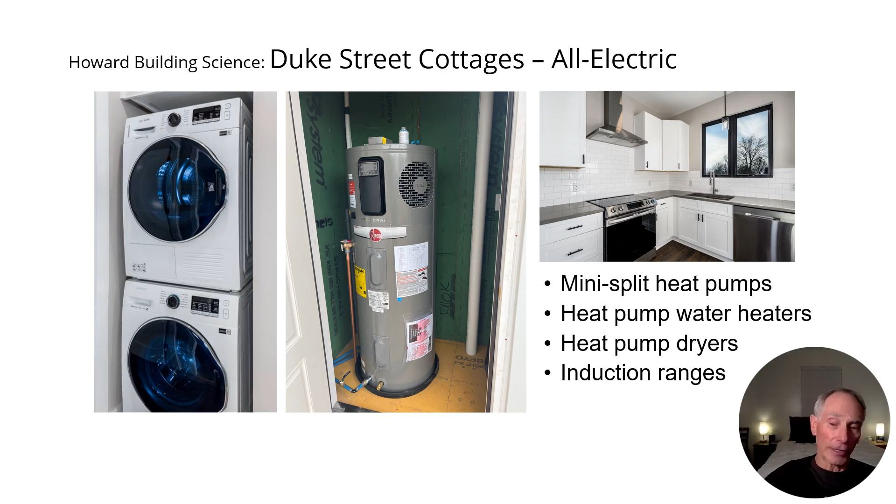Now, looking at the project details, you'll also see that it's not just that it's affordable, but the actual components and all the details come with excellent quality. First, you see this all-electric home comes with very outstanding components. You have the washer dryer that's high efficient. You have a very efficient water heater. You have efficient kitchen appliances, induction cooktops, and you also notice the kitchen counters and cabinets, also excellent quality.

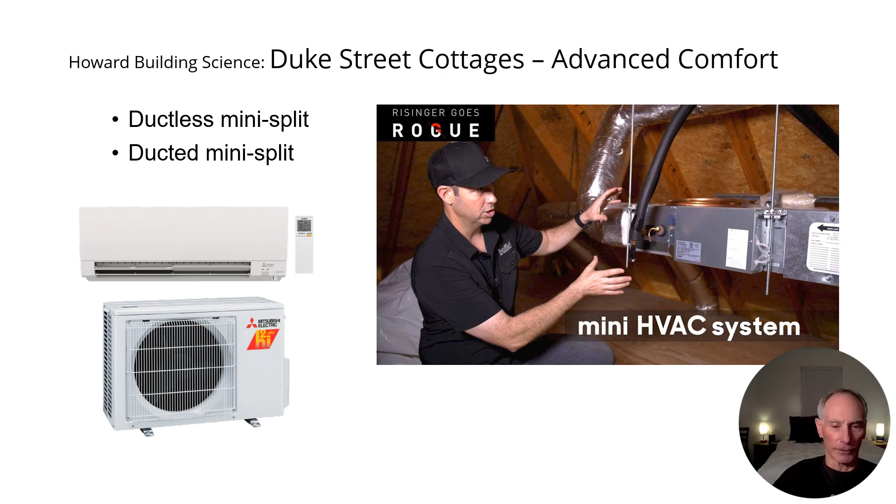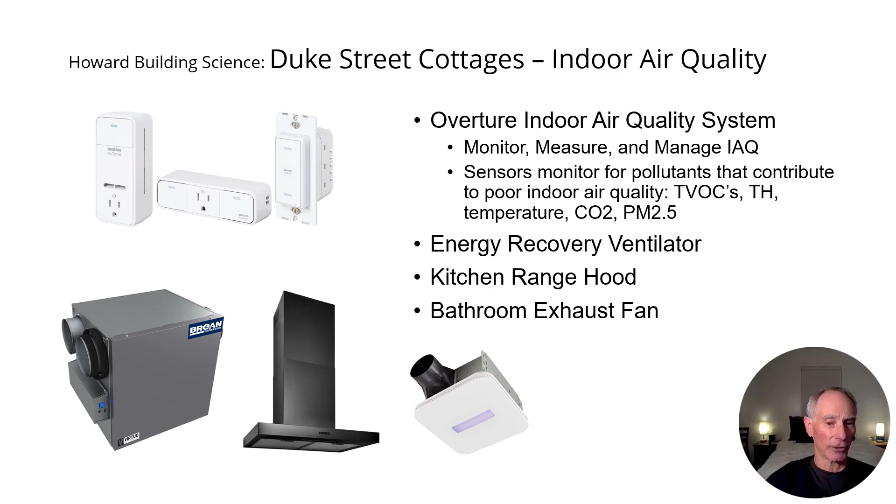Then comes the advanced comfort system. This uses a ductless mini split inverter driven heat pump for outstanding temperature control, low energy use, and really good comfort. So this is also a high quality feature of these homes. And last, in terms of quality features, I'll call attention to the indoor air quality package. In addition to all the requirements of EPA Indoor airPLUS, the whole house ventilation, the source control, the high capture filtration, you have monitors and sensors to actually track the outstanding indoor air quality performance of this home. So this is an outstanding home.

So before we go into that, I do want to highlight one very significant feature of this project. It is SIP optimized. Last video we showed you the resource for determining if you're SIP optimized or not. That's an important resource for you to check. But when you're SIP optimized, you'll see that the numbers come out really compelling in terms of the business case for using SIPs.

Here I show the floor plan, which is a very convenient, simple geometric shape. It has 2-foot dimensions, which work with the SIP panels being used. Look at the roof line, how simple and easy it is to build with SIPs. And in addition to that, the locations are easily arranged for the posts and the beams, and the span from the walls to the ridge beam are all aligned with meeting the requirements of the SIP panels. So again, outstanding optimization for this project.

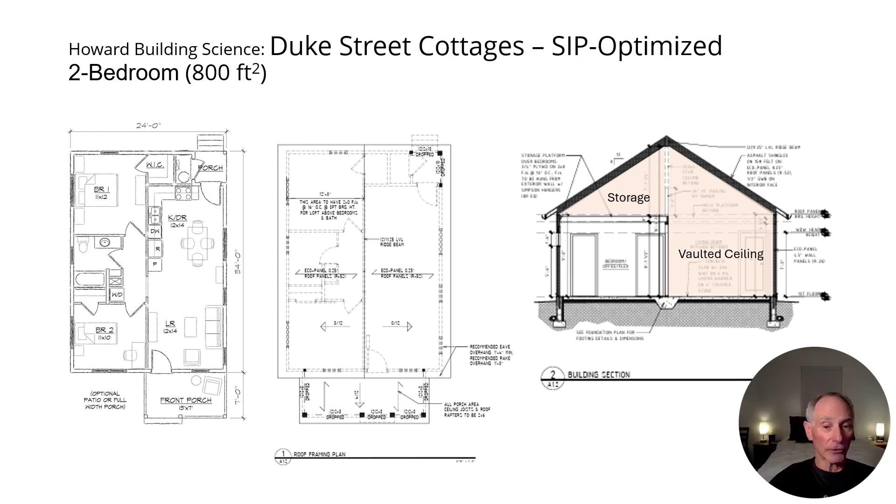Let's see how it works with SIPs, with the SIPA True Cost bidding tool. And as we discussed last week, this is where everything begins. You go to the guidance documents that you can choose from, and you use a bidding tool checklist on every project you do.

It's completely organized to align with the inputs, as you will see on the following slides after we look at this. Last week we showed you the layout of the checklist. Now what you want to do is complete it for a specific project. The key point to know is you don't have to fill in every number. If you don't know it or it's missing and it's not critical to the project, don't worry.

Let's go through one section at a time, starting on the backside of the checklist with cycle time. What we've done is group all the individual construction components so you can easily enter the cycle time or number of days required for framing compared to SIPs. So you see for structure, it's 6 versus 3 days. For insulation, it's 2 versus 0 days. And of course, that's because the insulation comes with the SIP when you install the panel.

Airflow control is 3 days versus 0 days. And again, this is because the SIP installation, as you will see, includes all the airflow control. Finishes is 2 versus 1 day. Mechanical, electrical, plumbing, or MEP, is an extra day for SIPs. We'll explain why a little bit down the line here. And then quality control is 2 days for framing versus 0 days for SIPs. So it's really important to figure these out on the front end because cycle time is a very important component of true cost.

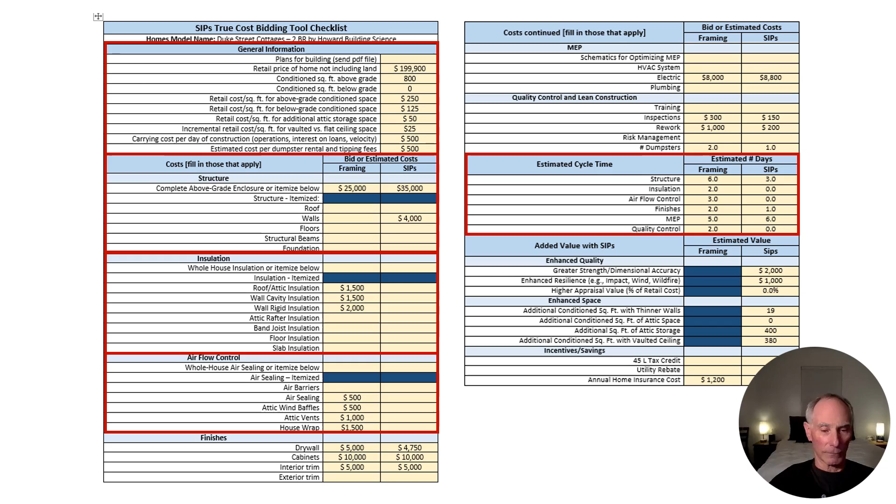So you see those costs for framing, but no costs for SIP. Then for finishes, you see a cost difference for drywall, $5,000 versus $4,750. We took a few percent discount for SIPs because with construction of drywall, in this case, you have the OSB around the entire perimeter, which means you don't have to find studs for attaching the drywall and then cut and have waste and time and all the effort to get the waste to

the dumpster. So normally I would recommend 20–25% of the drywall price be a discount number you deserve because of all the reduced waste and labor by the drywall subcontractor. But this will be something you have to eventually educate the drywall contractors and work to get them to provide that discount. Admittedly, right now it can be difficult.

For cabinets and interior trim, it's the same prices. I put them in just to keep a record of costs. The SIPA True Cost Bidding tool is a great tool and resource for you to kind of document the numbers that you learn for construction cost.

Then comes mechanical, electrical, plumbing, MEP, and the only number I entered were the different costs for electric. I assumed this would be one of the first projects for the electric subcontractor and that maybe they attach a 10% premium. So the $8,000 would be the cost with framing and $8,800 for SIPs.

What's important to note is that what we hear over and over again is electric subcontractors get used to wiring SIP homes very quickly with no additional expense, and some electric subcontractors say it's actually easier with SIPs. So as you get past the learning curve, you should almost have no cost difference between framing and SIPs for electric. You should also note there's a line here for schematics for optimizing MEP.

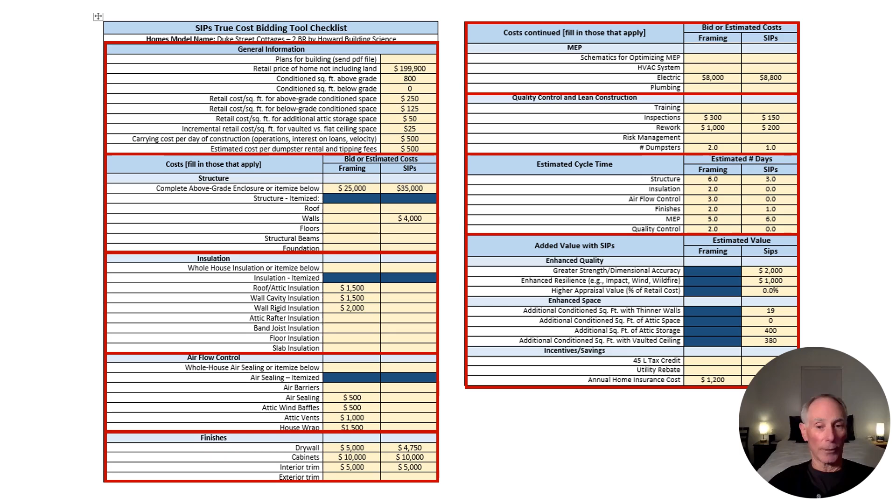Now the hard work is over. You've collected the data. Now in minutes, you can enter it in the bidding tool and get your results. So let's move to the bidding tool.

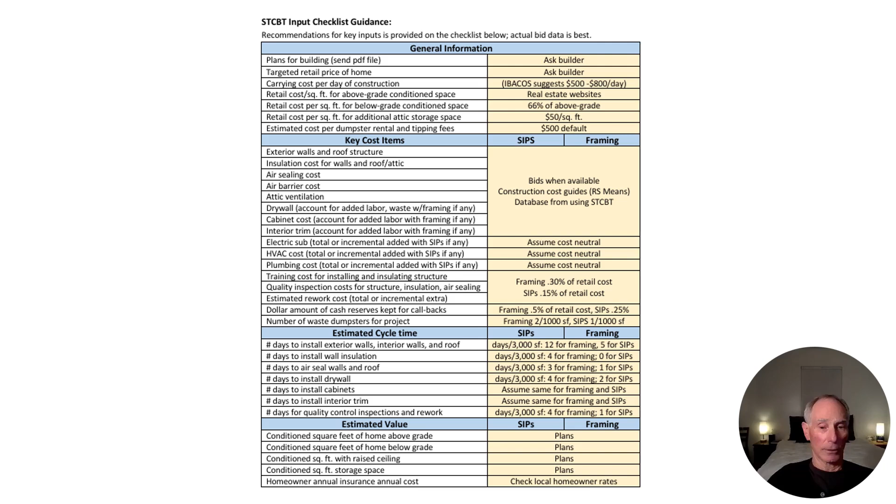But first, let me again remind you that you have this guidance document called the True Cost Bidding Tool Input Checklist Guidance. A lot of the numbers I've used in this quick review of how I filled in the checklist for this project come from the suggested default numbers on this particular reference piece here. So remember you have this if you get stuck, to pull some numbers out to fill in blanks on your checklist.

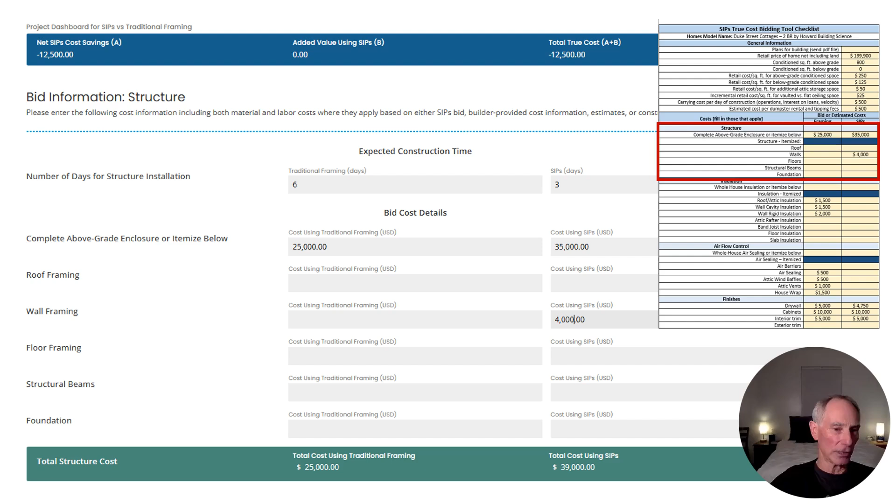So the total true cost, the savings plus value, is minus $12,500. I'm not going to review the detail of how we get to these numbers on the next sheets. It's always the same. What I will highlight, though, is how the net cost savings changes as we incrementally add more inputs for each component.

So let's go to the next page, insulation. These are the insulation numbers we put in on our checklist. Now we simply added them to this page over here. You see the costs for roof attic insulation, wall cavity insulation, and rigid insulation or continuous insulation come directly from the checklist, with 0 cost for SIPs. And remember on the back side we had the number of days for insulation as 2, and no days to install insulation for SIPs because the insulation is part of the SIP assembly.

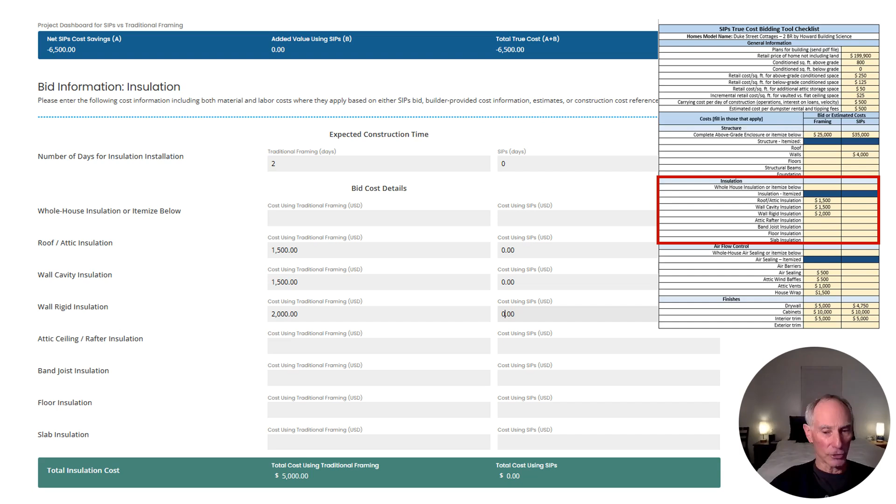There's no additional insulation contractor coming in to do the work. So we save 2 days not having that trade come in to do the insulation. So now you see that sum here is 0 for insulation, just for the work on insulation, not counting time. And the sum for the insulation for conventional framing is $5,000. So now we have $5,000 plus 2 days is $6,000 of net cost savings with SIPs. So the $12,500 dropped to $6,500 negative. We lost $6,000 from the number on the first page when we just did structure. And that's how this will work.

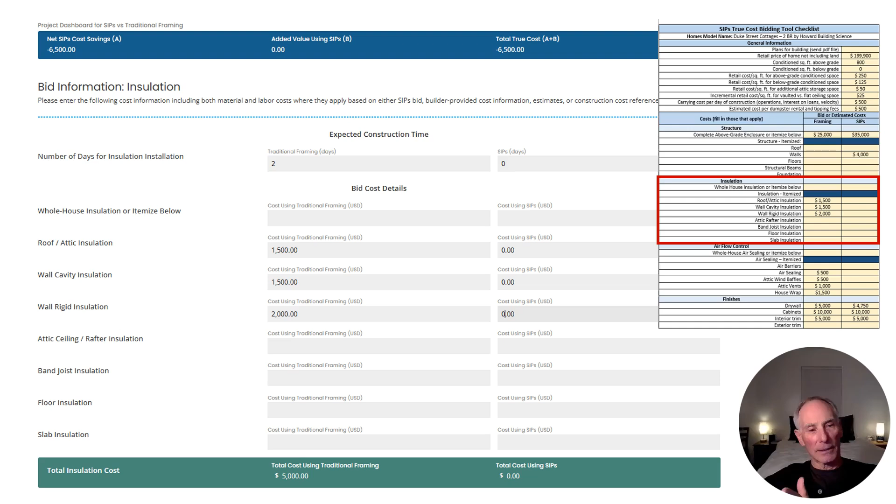As we keep counting all the cost factors to get to the true cost, this number keeps decreasing, except when we get to electric. We'll talk about that there. So the next page is airflow control. This is the section for airflow control. We take all these costs for the airflow control that we discussed on the checklist, and we drop them in here: 500, 500, 1,000, 1,500. And because they're included with the SIP provider, those costs don't occur with SIPs. So we have another $3,500 of cost savings, another 3 days, and now this number is down to minus $1,500.

Then we go to finishes, and we gain a little bit. Again, here's the section with finishes where we had the numbers we talked about on the checklist. We drop them into the tool, just put them right in. It's, again, all aligned, the checklist and the tool. We take the days from the back side, which are 2 days for traditional framing and 1 day for SIPs. Most of that savings on the 1 day comes from less work installing drywall on the exterior walls. So now we have a small amount of extra savings, and this is down to minus 750. Keeps getting lower and lower. We're almost to cost parity, and keep getting more hidden costs integrated into our proposal.

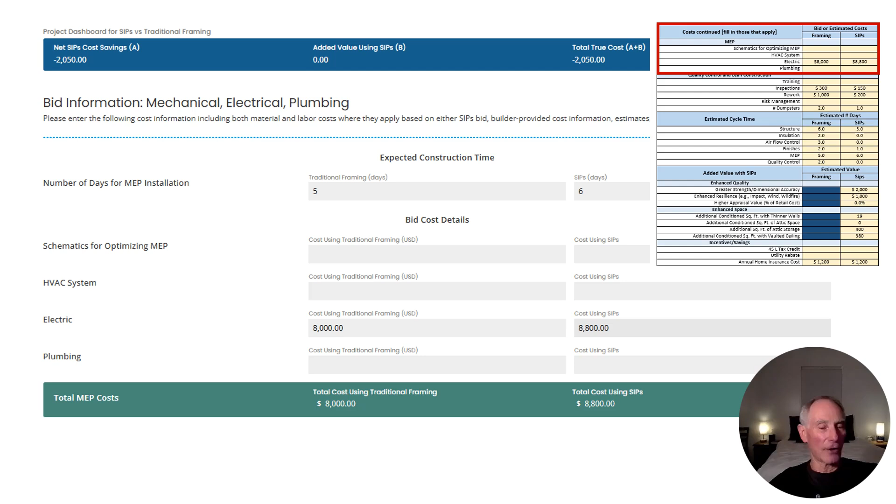On the next page, we deal with mechanical, electrical, plumbing, MEP. So now we're on the back side of the checklist, on this section. As mentioned, we only put in the number for electric, $8,000 versus $8,800. So now the net cost savings will change a little bit, because we have additional costs for SIPs. And this is why I put it in for this example. I wanted to show how the numbers can work up and down. And there's also the extra day, $500, 6 versus 5 days. So now the 750 goes up to 2,050 negative. So it costs more to use SIPs, over 2,000 more at this juncture in the tool.

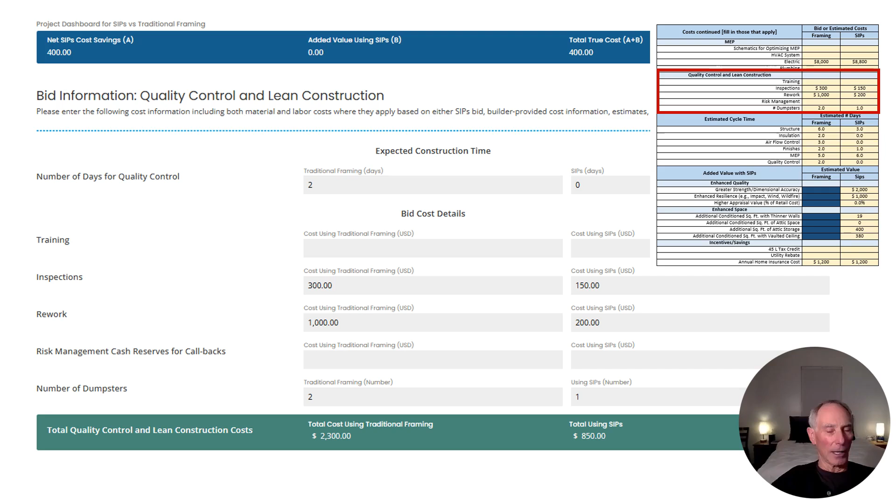Now on the next page, we go to quality control and lean construction, and we take this section that we completed in the checklist and drop all those numbers into the tool. So $300 for inspections versus $150, $1,000 for rework versus $200, 2 versus 1 dumpster, and in the cycle time section 2 days versus 0. So now we go cost positive. We're $400 savings because we use SIPs. At the last construction cost component in the tool, we've gone positive, so we're saving money using SIPs compared to framing. Now we move to added value, and you'll see we get even further cost advantage. And remember, at the green bar, we're just always totaling these costs, not counting for time.

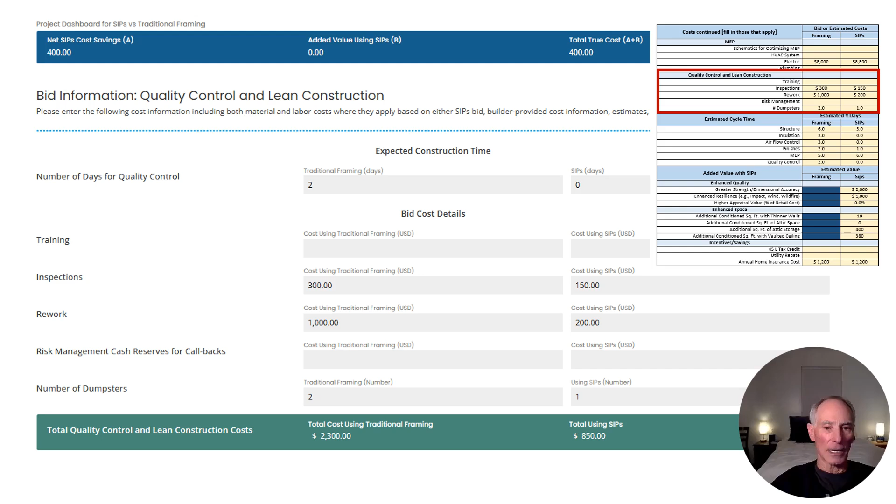So now we go to the added value page of the tool. We're in that part of the process, and this is the section of the checklist that we're on, and we're going to insert all these values right into the tool. $2,000 for quality of strength and accuracy, $1,000 for resilience. We have the 19 square feet gain because of thinner walls, the 400 square foot storage loft above the bedrooms, 380 square feet of vaulted ceiling, and no benefit. We assume that the project qualified for zero energy ready before SIPs with just framing, and so we're assuming no benefit there, and we're documenting our insurance cost.